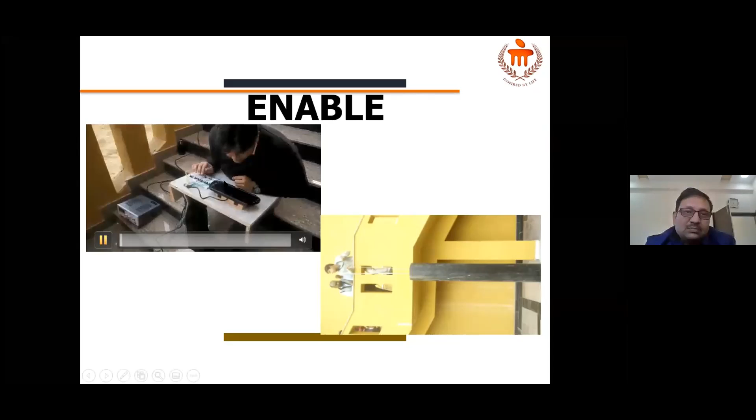So what we tried with my team here in Manipal University, Jaipur, is a similar exercise by making a robot. I'm going to play another video for a short time. This is the instrument, the robot goes inside, and on a dummy baby, what we do is figure out where the space is around the baby, and grip the baby and pull it out.

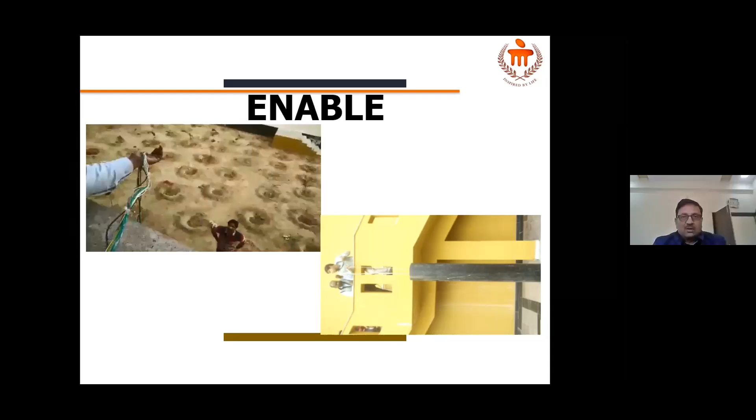We created a small 12-inch borewell, or 8-inch borewell, and we created a robot. The robot goes inside and is controlled by a person sitting outside.

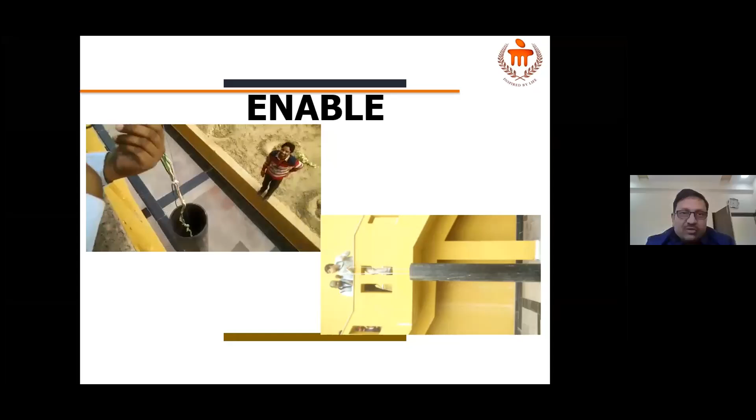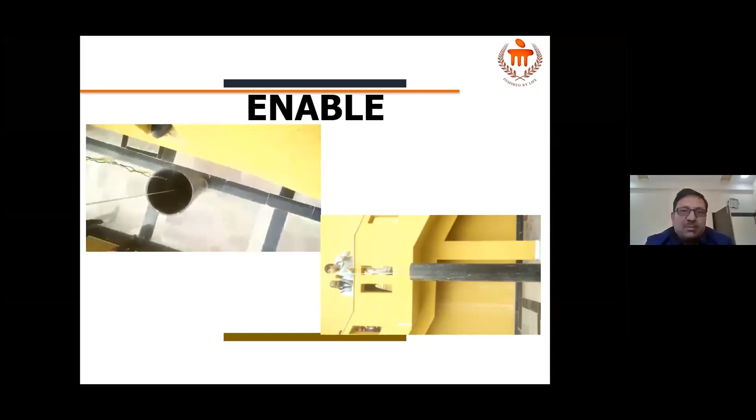We also made it programmable, but with the help of human intervention through visualizing sensors and cameras, it became slightly easier. So we continued with the camera, but it is a robotic arm for rescue in borewell operations. It's trying to find out the space around the baby, or a dummy baby, or a bunny which we have thrown inside this tube.

When it goes around, it is a very interesting field actually. You see how difficult it is, what methods we use, and can't we all make this technology perfect?

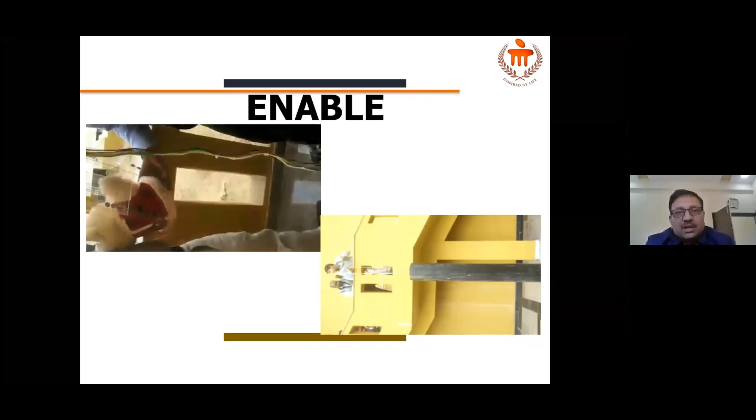On the screen it was visible, and see, this is the small machine that we have made, and inside you can see the bunny now. The bunny is being pulled out, and there's similar enthusiasm among the team, and they are very cheerful after having this bunny outside.

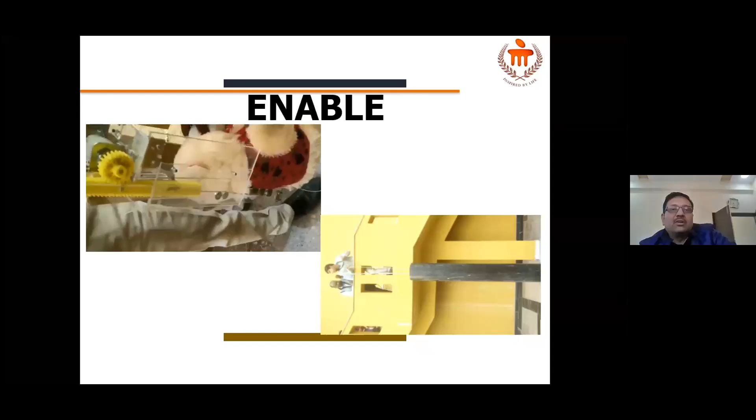Now, this has not been experimented on in real time, because though we were called to one of the districts and the SP, Superintendent of Police, did call us, by the time we reached the spot, everything was unfortunately in a bad shape.

So this technology of robots should also be for societal connects. If you make a robot for society, that is what should enthuse the listeners of today's talk. My understanding is, just for the sake of fascination, we should not learn robotics. Robotics should be learned to use it, for a purpose that actually gives society something back.

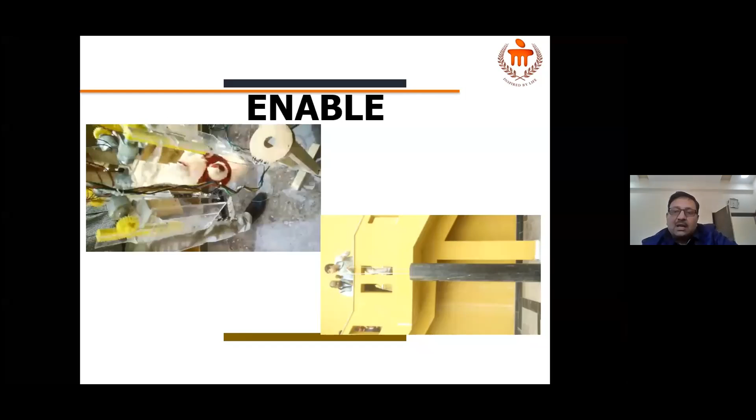I have one more example. There are a lot of people who have had an amputation. The hand gets chopped off, maybe in a military region, or maybe someone working in farms with thresher machines. We have a Samiti, a charitable trust here in Jaipur, called Bhagwan Mahavir Viklang Sahayata Samiti, and the director there, Dr. Mehta Saab, asked me to create something like frugal engineering and make a hand that is less costly.

Let me tell you, friends, that making a hand is not all that difficult. Bhagwan Mahavir is already making hands, but these are static hands. What is available in the market is one we call the Alimco hand, which actually uses a lot of stress on your body, gives a lot of stress.

So what we were asked - if you want something very sophisticated, the least costly comes from China, which is INR 1 lakh, minimum. And you can think of this money - if our Indian brothers and sisters would go for 1 lakh for one hand, how many of them can afford it? So the challenge given to us was to make a frugal, less costly hand.

And this is what we did with some of our students. I can show you the picture where the whole team is working here. The team has now opened a company, and innovations have happened in this. It's now called the Jaipur hand - like Jaipur foot, we have made Jaipur hand. And continuously we are improving on it.

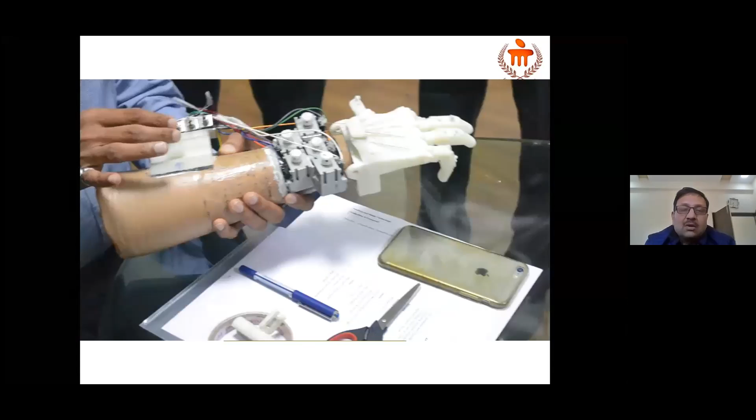I think there is a small video which I'll show also, so you can see how it works. You will have these switches, and these switches are now operated by Myo - you understand the muscle signals. So you can actually close and open the fingers and rotate the wrist also. This is a very old video, and it has improved a lot now. So this is the hand.

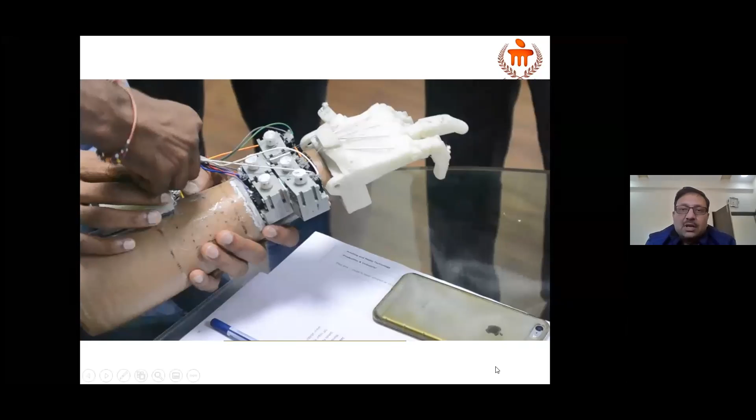Now let me come to this - so this was Jaipur hand. You can make your own hands, which is robotic, where these motors are switched on by myo signals, the muscle signals. It's a good idea - if you understand robotics, you can go for something useful to the society, and you can think of your own projects or pick up one of these projects as your own.

Now, as I'm talking too much on the hands, let us talk of the hand. Look at your hand - your arm, forearm, and the whole anatomy of your hand. If you look closely, you will see that there are links and joints. Look carefully - there is nothing mechanical there, but there are links. Links are made by bones, and bones are surrounded by muscles. The objective is to move the link by the joints, about the joints.

How do you power the joints in a real human being? By pulling and pushing muscles, and the pulling and pushing of the veins there. So you actually get your motion by a powering device, which is your muscle, and your links move about. I'm talking now more technical terms, so please listen carefully on this.

Between two links, there always will be a joint. Look at your hand or whole of your body, whether it is leg, hand, torso, whichever. So there will be links, and between links, there will be a joint. Also, between two joints, there will be a link. I'm repeating - between two links, there always will be a joint, and between two joints, there will be a link. We have to move the link about a joint and power that movement.

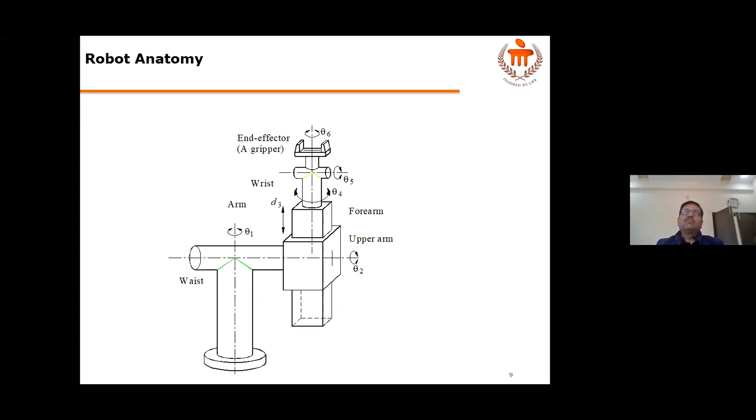So let us look at the second step of what we do after knowing and configuring our robot, whether it is 6 degrees of freedom or 4 degrees or 3 degrees. 3 degrees will not move.

End effector has to reach the workspace. So now going forward,

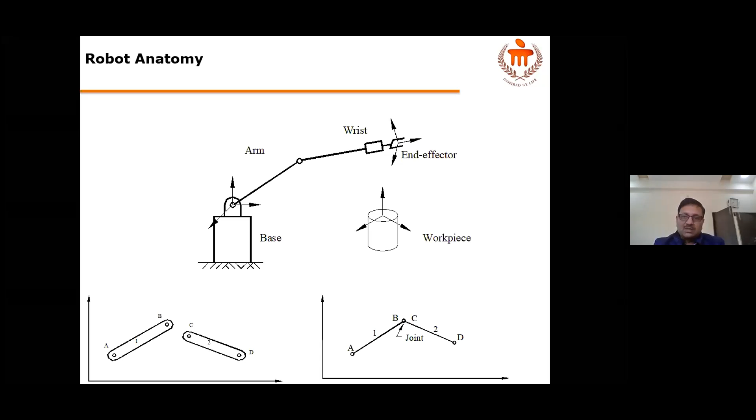What kind of joints that we have in our robotics, you can see that there are a number of joints which you can make. God has made joints which are multi-degree of freedom. For example, if you look at your shoulder joint, it is a ball and socket joint, right? If you make a mechanical joint, ball and socket, it is possible. But to control the motion, that means exactly rotate that ball and socket in X, Y, and Z direction, is a tricky problem till today. So instead, we prefer in robotics single degree of freedom joints.

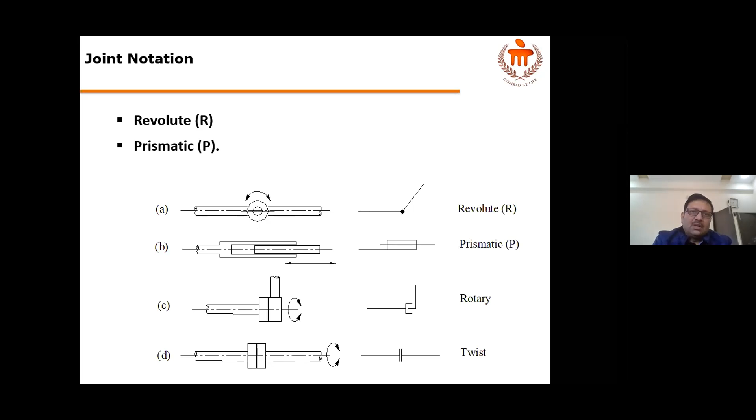Now, what we need to do here is, combining these, there are very many kinds of robot configurations that can be made, like your gantry robot. Gantry robots have 3 prismatic joints, which move in X, Y, and Z. So you must have seen these in some of the industries.

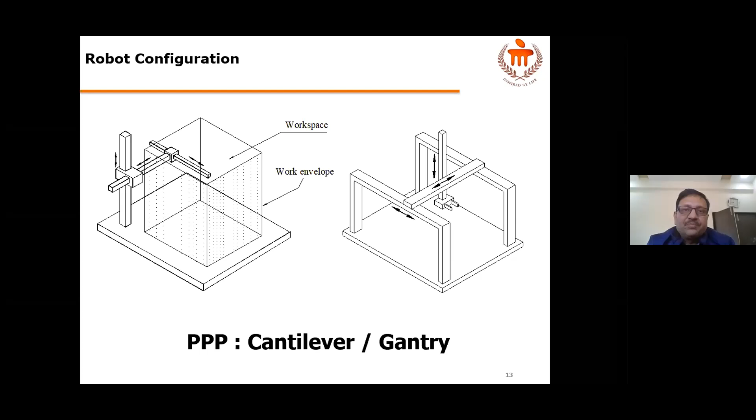So keeping that in mind, you have many configurations that all move prismatically. All three joints are prismatic. So you can see that the first joint moves up, second joint moves in Y direction, and third is in X direction. So one is in Z, one is in Y, one is in X. And you get a workspace like this. That means within this cuboid, you can actually operate on any of the workpiece by moving certain distance in all the 3 directions. So having this done, we may have an RPP type kind of thing.

Look at the geometry, that cylindrical geometry if you want to make. So you must have one rotary joint at least. So you see one theta direction and 2 D directions. So this particular robotic configuration moves in vertical direction and lateral direction, but also rotates, creating a cylindrical geometry. So this type of configuration we call RPP.

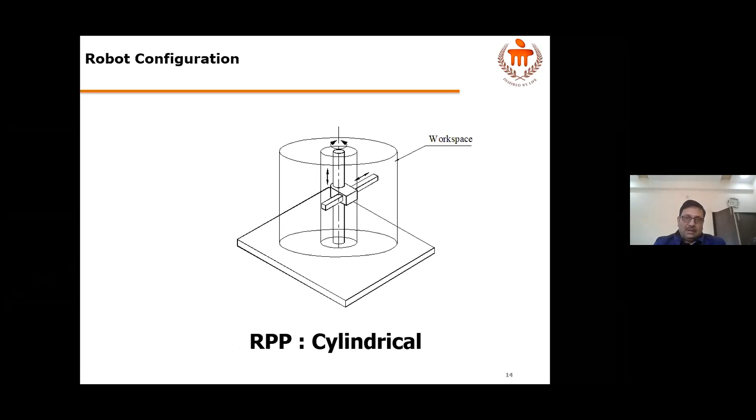Similarly, you can have a spherical robot, which is RRP. So you can move in azimuthal angle or zenithal angle. That means 2 rotations and 1 prismatic. So you will have a spherical robot.

I mean, manipulating, how do you want to manipulate a particular instance? You may choose a gantry robot. So sometimes your industry does not require cylindrical manipulations. They only require to pick and place from the top. And therefore, what you do is you have only a PPP kind of robot there, but in more sophisticated spaces where you have to bolt something from an angle and you have to put something on the top, if these kind of things are there, then you really need a spherical robot.

So you can make these kind of combinations of joints to create different kinds of shapes, that is the work environment in which your robot can work. So there are a number of such things which you can easily find out in your textbooks.

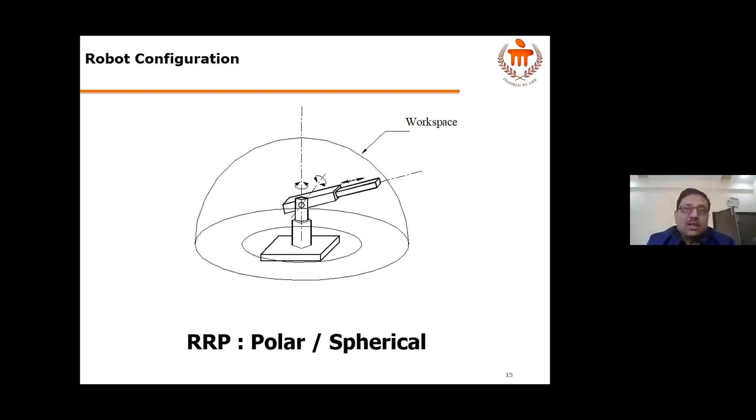But this figures out what kind of design are you making. So similarly, RRR is a revolute or articulated robot, and SCARA is a special category, which has 4 joints, RPRR.

This is called SCARA configuration, selective compliance assembly robotic arm.

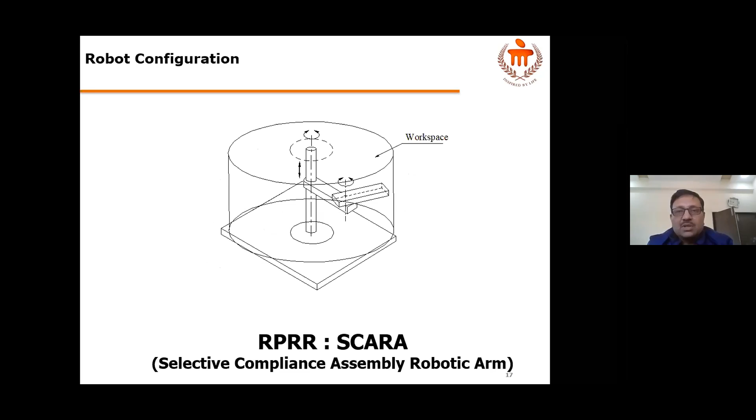Your wrist has three motions: yaw, pitch, and roll. Yaw, pitch, and roll mean you can move your wrist up and down, sideways, and also rotate or twist it. These three angles can be obtained at the wrist joint using a simple configuration. So have the first 3 degrees of freedom, RRP, RPP, PPP, and then put a wrist there. With this, you have a very highly flexible robot, what we call a dexterous robot.

We call it dexterity, meaning manipulability from many angles. The higher the dexterity, the higher the manipulation ability from all directions. So you can achieve this by having a particular configuration and then putting the wrist over it. This is mechanical configuration.

Now suppose this particular wrist has been attached to a certain robot, and a point is defined at the faceplate. Suppose a point is defined on a frame XYZ on the faceplate.

Am I audible? Somebody can confirm. Am I audible? Yes, sir. Yes, sir, audible, sir.

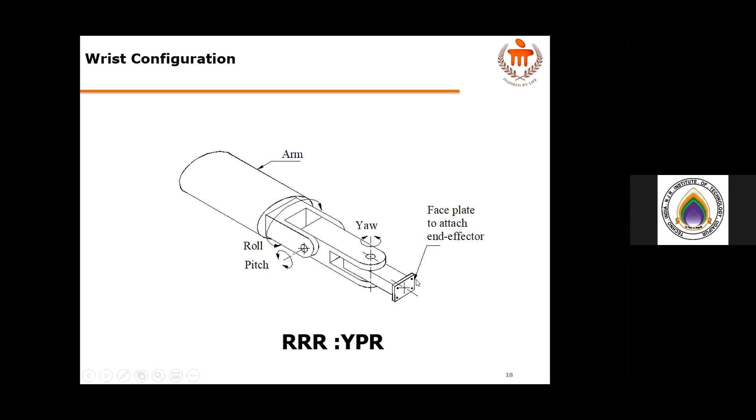Okay, so put simply a frame on the faceplate XYZ and define a point on that XYZ. Now, how much should I rotate, or how much is that point visible to the pitch of it?

I have to transform that point from one frame to the previous frame, and so on, until I go back to my fixed end. This is called transformation. So there are rotational transformation and translatory transformation.

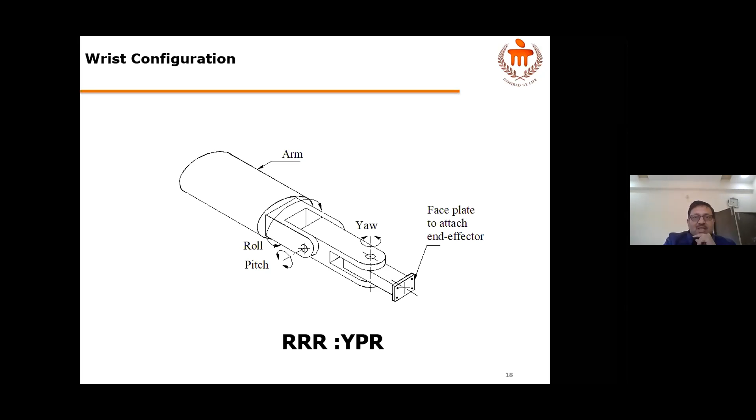That is the next step, we will know by this. This is called forward kinematics, and that is a very important thing. For example, if you have a robot like this, you have a base frame. So the base frame is X0, Y0, and Z0. And the final frame on which an object has to be is the tool or end effector frame.

This XYZ of the tool or end effector frame will be sensed by a sensor, which may be a CCTV camera, CCD camera, infrared ranging, or whatever ranging or sensing system. You actually find out first the coordinates of the tool or end effector frame. It has to reach the object. So that particular sensing is done, for example, and then you also sense the base frame through the same sensor mechanism.

In between, on all joints, we fix up frames. These frames will be rotated and translated with respect to the previous frame. How much this point of the end effector is visible with any of these frames is what is studied mathematically, what we call dynamic analysis or forward kinematic analysis in robotics.

What this will give you is, with the transformation matrix, given θ1, θ2, up to θn, you will be able to tell how much is XYZ. I am repeating: if you remember what I said in the beginning, joint space will give my Cartesian space coordinates. A rotation of each and every joint, θ1, θ2, θ3 to θn, will tell me how much is XYZ.

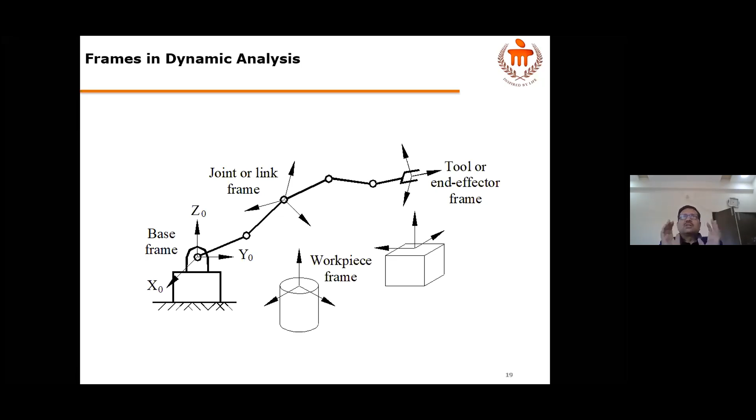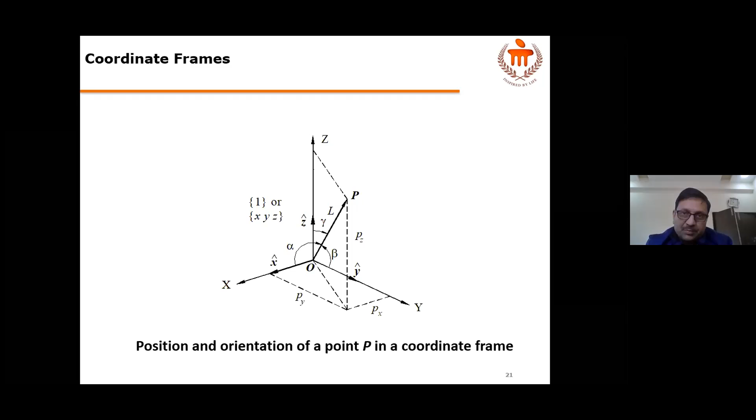Suppose there is a point P, and this position and orientation of point P in a coordinate frame is known. If you know the point P in a frame, which to me is the end-effector frame, then you define that point in the first frame as 1P.

So this is a simple vector matrix notation of point P. The distance of point P is Px, Py, and Pz. If any point Px, Py, Pz has to be defined in a frame, it will be written as Px x cap plus Py y cap plus Pz z cap. All right, so this was simple.

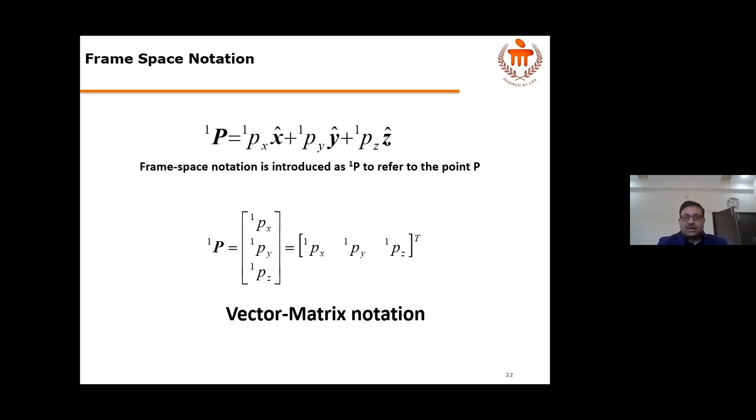Look at the right hand side: the same point 1P I have already defined as Px x cap, Py y cap, Pz z cap. But in a second frame, if I have another frame UVW, apart from the XYZ frame, this UVW frame is rotated relative to XYZ. It is not translated. Suppose at the same point I have another XYZ rotated in the XYZ direction, and now I call it the U, V, and W frame.

So let me define the same point P in frame 2, which is my UVW frame. Suppose in this second rotated frame, the X direction is represented as U cap direction, Y cap becomes V cap, and Z cap becomes W cap. So in the second frame, suppose the distance in the U cap direction is PU, in the V cap direction it is PV, and in the W cap direction it is PW.

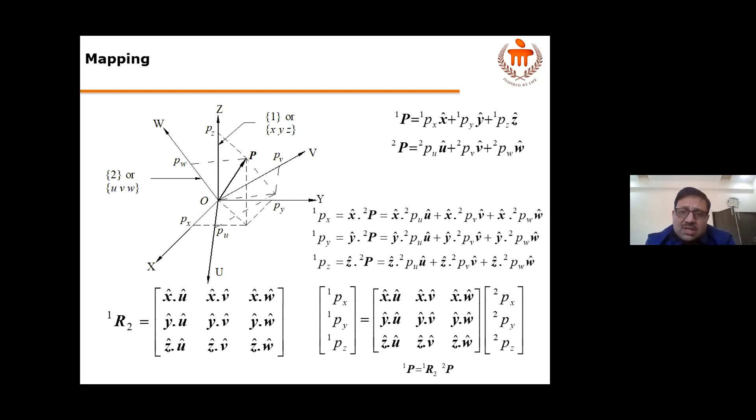Therefore, the same point P as seen in XYZ, that is 1P, will be nothing but u in 2P plus dx along x cap, plus v in 2P plus dy along y cap, plus w in 2P plus dz along z cap. So therefore you will have 1P as a translatory matrix.

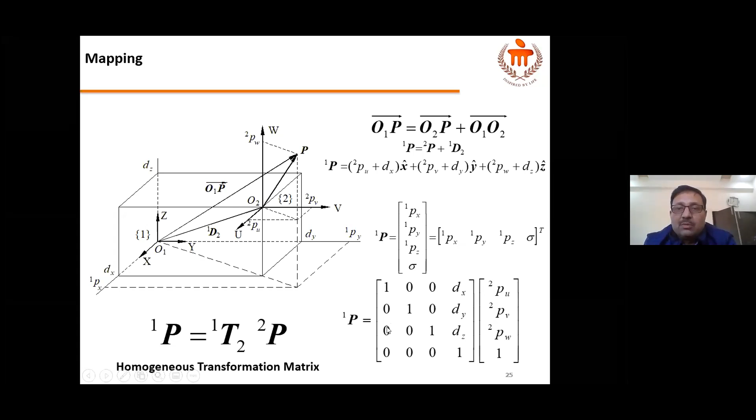If you combine the rotation and translation, then this identity matrix—1 0 0, 0 1 0, 0 0 1—will be replaced by your rotational matrix, something like this. If both rotation and translation happen, then your overall transformation matrix will look like this: the 3 by 3 block is your rotational matrix, the 3 by 1 block is your translation matrix, then 0 0 0 is your perspective matrix, and sigma, that is 1, is your scaling factor.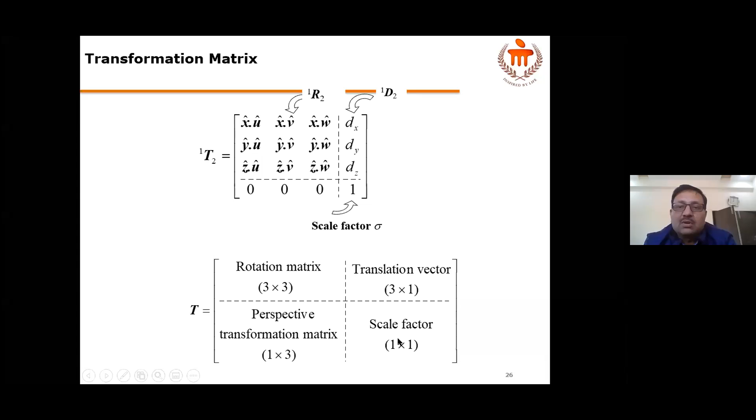So you get a transformation matrix, and if I have to transform from one frame to another, I keep pre-multiplying them and get it up to the baseline.

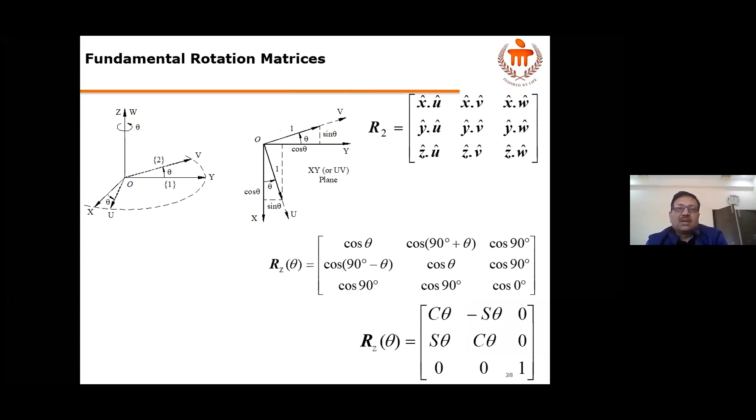So I think if I put the thetas there, I'll get the real values, and I'll solve a problem for this so you understand it more clearly. Suppose, so here, coordinate...

I have one quick question—so that scaling factor is only one value. What if we have different scalings in the X, Y, and Z directions? Is that possible?

It is enlarging—that is actually what happens through the camera, we have a perspective. No, but so the three... No, with the single sigma we are enlarging by the same amount in all directions. That is the sigma factor.

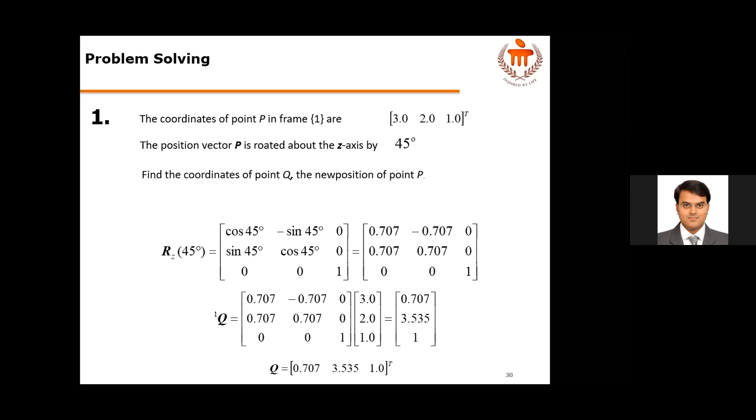Okay, so for example in computer graphics, we may stretch something in one direction and leave it unchanged in the other two directions—then it will not be applicable in that situation. No, then you do the perspective.

That means you enlarge in the x direction—there are 0 0 0, you put some value there. So in x direction, suppose you want to enlarge in two dimensions—you put a perspective, so that through perspective vision, this dimension has got enlarged by this much amount. So this is homogeneous enlarging, zooming in or zooming out.

Correct, and inhomogeneity is more complicated, so I'm not including it here in the first go of lectures. If we are really interested, then that thing should also come, but we don't play around with it because it is not that complicated an environment in real time—we don't keep enlarging in X and Y inhomogeneously.

That may be of interest to an academician, for someone who wants to make a difficult paper and complicate student life—let us make it easy and tell them that in real time we only need some enlargement. Normally it's the perspective which plays: the camera takes a sense of the object and grasps it, and that grasping happens through a perspective where some of the dimensions get enlarged, and that is the perspective part of it. So I think I am able to answer that for the students—yes, also yes.

And then a difficult task. I'm trying to concise my lectures, at least giving some glimpse of mathematics which goes on. And mathematics is not difficult, as you have seen here. It is only transformation and getting theta to x and x to theta.

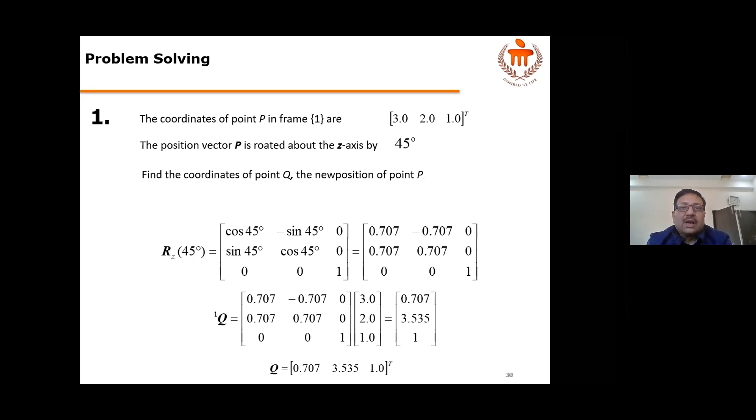And if translation and rotation both happen, then another exercise has been given which you can go through. So what I mean to say is, forward kinematics and inverse kinematics are the two steps you do first.

And if we are able to do this vector-matrix multiplication, pre-multiplication, that happens through your programming, and then you control your joints. And then you take up the dynamics and controls part of it. So this is what a robotic study will take you to, which is currently being done.

But in Industry 4.0, the controls will be through IoT. I mean, sitting in your chamber, you may be able to control robots. You may be able to change programs. Sitting in another city, through the internet, you might be playing around with devices which are robotic in nature. So that is what is being expected today, and is possible today, which we are all doing.

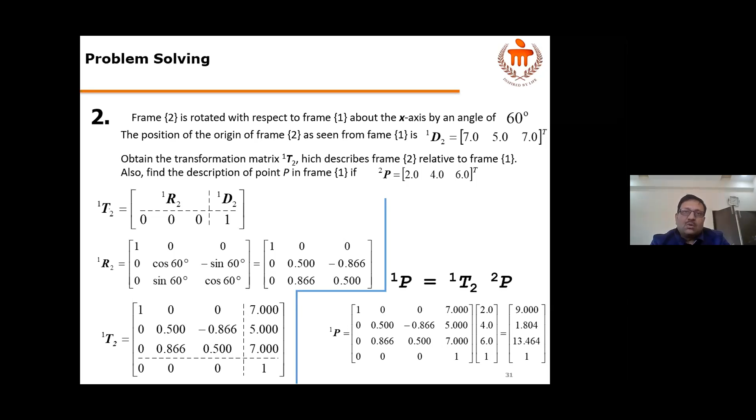Having said that, there is another field which is developing, and this is more interesting, which I wanted to tell the students of this particular interaction session by TEQIP 3: that not only in this direction is there a lot of possibility of macro robots, but also one new field which is coming up is the miniaturized world. I mean, everything is happening at a smaller level. So let me say, whose world is this?

Do you know how many ants are there on earth? We feel that we control the earth, but who is actually controlling it? We don't know, right? We saw this effect during Corona, where we were inside our houses and nobody stopped the ants from coming out. Just giving an example and analogy. There are 10,000 trillion ants on earth by a rough estimate from National Geographic, and humans are only 7.2 billion. They are more organized, and in a small sense, they are like us. They are living beings, while human beings are living beings with a brain. So if a small device like an ant had a small computer chip, it could act in a very strange manner. The world actually makes smaller things survive more than bigger things.

You have seen that bigger sizes have vanished from earth because they required more power to move and more food to survive, and nature didn't favor them. There is very high attention among scientists on the smaller world, trying to make smaller robots.

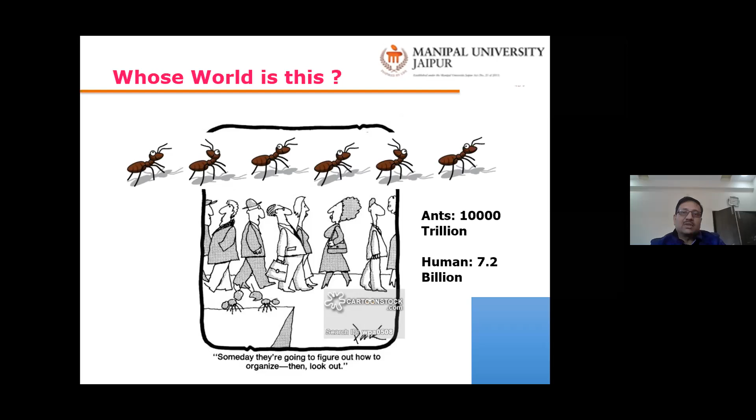As I said, nature has millions and millions of submicron species, like your virus. The coronavirus is changing every day, coming in with different strains, and millions of them are surviving. Whereas the mammoth has gone extinct from nature - larger sizes, maybe 10, 100, 200, or 1000 times our size - those species are not available anymore. So why not think of making smaller devices and smaller robots, not just devices, but robots?

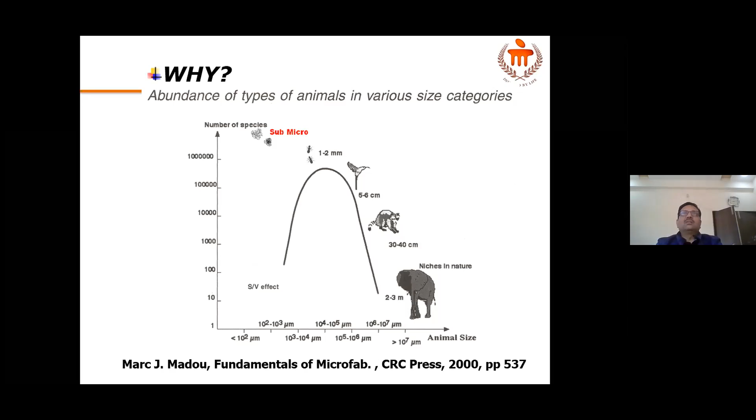In this direction, nature actually plays around in smaller domains only. The colorful things which we see around are not actually pigments - they are actually a play of nano-texture. The texture creates interference, light interference, making it colorful in different ways.

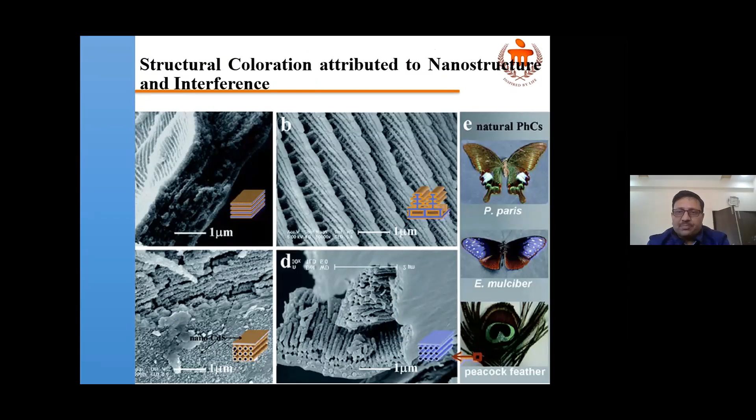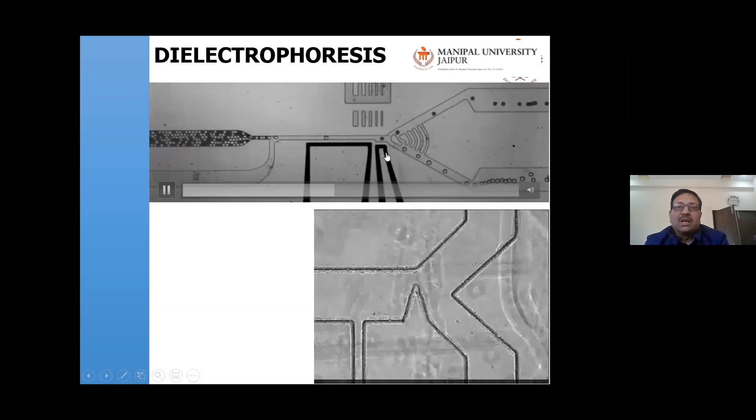Let me show you these smaller dimensions. You can use dielectrophoresis to separate out particles. You can see one going on - simply by doing a dip here and applying electricity across, they have separated the cancer cell. You can see that the bigger cell has gone to one side, so if there is blood cancer, you can separate the cell. In the lower video, you'll see that bigger dimension cells go in one direction because we've given an indent here, changing the electric field lines. The smaller dimensions are very useful, and along these lines, we were thinking of micro robots.

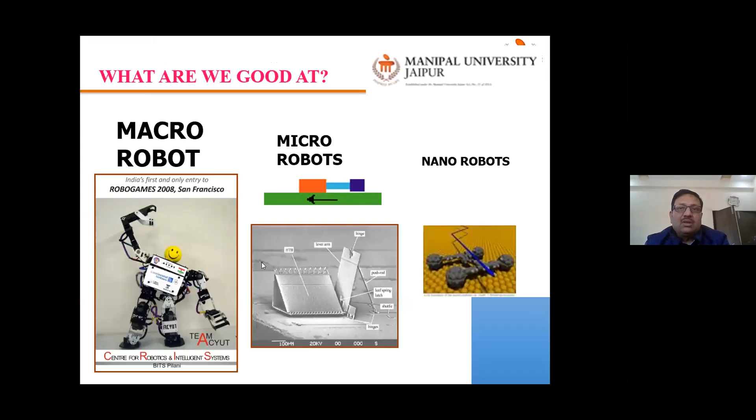They are difficult to manufacture. Micro robots are easier, so microrobotics is maybe used for handling objects with very small dimensions. So if you want to learn about the world of ants, you have to have that small camera or small object to go inside the ant world. Or you want to do micro assembly.

Suppose your mobile is not working today. Maximum you will do is throw it away. Why? We can actually repair it, no? If there is some circuit which has got burnt off, not visualized by eyes, but if I have a micro robot, we can actually fix it. If I ask you to throw away a car because some pipe has got broken, is that possible? No. So similarly, when there are small devices in our hands, why do we throw them away, creating junk?

So micro robots, smaller robots, biotechnology, medical health, maintenance and inspection, monitoring and surveillance, everywhere. And if you want to read more about it, just search IEEE robotics microrobotapplications.pdf on Google, and you will get the complete story of why micro robots.

So this is another dimension which is going to come up in the next industrial world. And when I talk about this smaller world, the robots which we imagine walking around will not walk, because modes of motion normally are walking, crawling, hopping, flying, and swimming. But in nano domains, only flying and swimming is possible. So smaller robots will not walk, crawl, or hop.

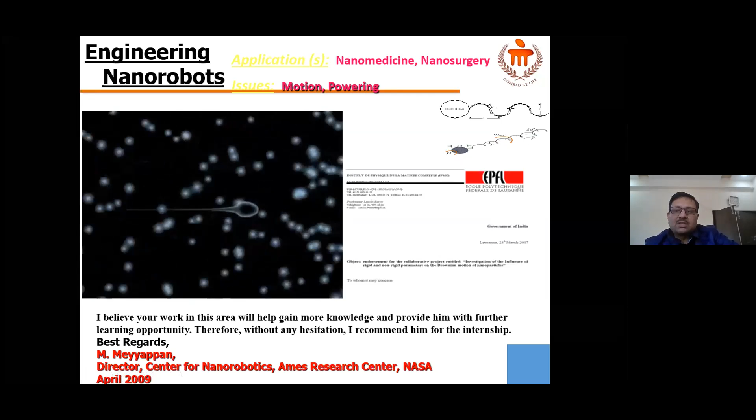So you can see one of my works which NASA took up, a swimming nanorobot. I'll repeat this video again. You must be having a flagella. So what you must have seen is how biologicals move in nano size. You see that biologicals are something very near to what I'm talking about. So they fly or swim, very rarely they crawl. And how do they fly or swim? In three ways, shown here.

And the three ways are shown here. Either they have a flagella, or they have a motor which we call a myosin fiber motor protein bundle. The second figure tells you there is a motor protein bundle which carries things along that bundle. Or you have what is called advancing a cell on a substrate by adhering gel, meaning it actually sticks and then slips, sticks and then slips.

This is the first method, schematic representation of advancing a cell on a substrate. There is a cell body, and what it does is it protrudes itself. Adhering gel is there and non-adhering. As soon as adhering gel is there, the cell body moves forward. Similarly, it again moves forward by pushing its gel. But the best method is flexible oars, that it has a flagella, for which I have just shown you the video.

So looking on to these points, friends, my group actually started analysis of flagellar motion. A lot of research has already happened in this direction. My suggestion to some of you who would like to take up this next generation robotics, which is nanorobotics, is you can think of your own experimentation. See, macro robot is fascinating, and there is a lot of understanding, and the field is saturated on the mechanical side and designs, with many groups already working on it.

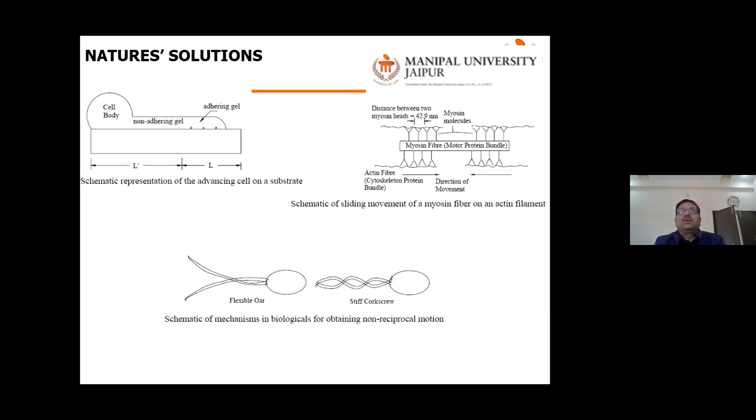Going forward, you could do macro robotics with a societal intent, like making robots for rescue from borewells or something like that.

My suggestion is, if some of you want, look at what we have done here with flagella. Still, we have not done anything on the powering of nanorobots. How do I make my flagella flap? A motor that small is not possible. How does nature do it? By converting ATP to ADP, adenosine triphosphate to adenosine diphosphate. There is a controlled chemical reaction that powers the cells. If you have cell motion, it is actually powered by some chemical reaction. We do not have any technology for this, and this field is quite open.

Across the group, we are stuck with how to power the nanorobots. In real time, a fixed robot in industry today gets its supply from electric power lines. There cannot be an electric power line for a nanorobot inside your body. So these are challenges, and if somebody takes an interest, solutions are there. There are many transduction and transmission systems already studied. There are issues, but they have been studied. There's hydraulic, electrical, chemical, many ways people have tried, but no matured solutions have come till date.

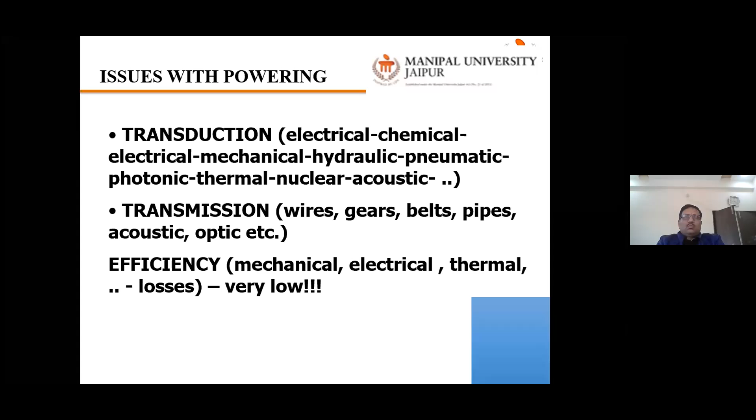So what happens is we may have challenges on board and off board kind of thing. Self-generation is something we can think of, but this is about powering.

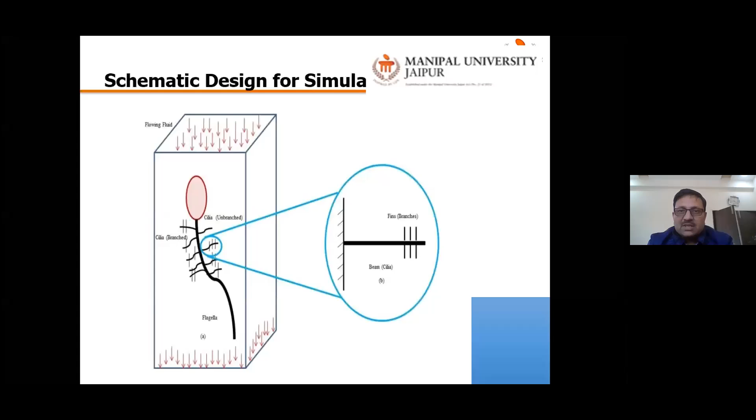Now, what we have done is, if there is power available to flap the flagella, we increase the efficiency by making branched flagella, like flagella with cilia we must have heard of. We made branched flagella, and a lot of publications have already worked with flagella. We made an experimental setup also, which I'll show you.

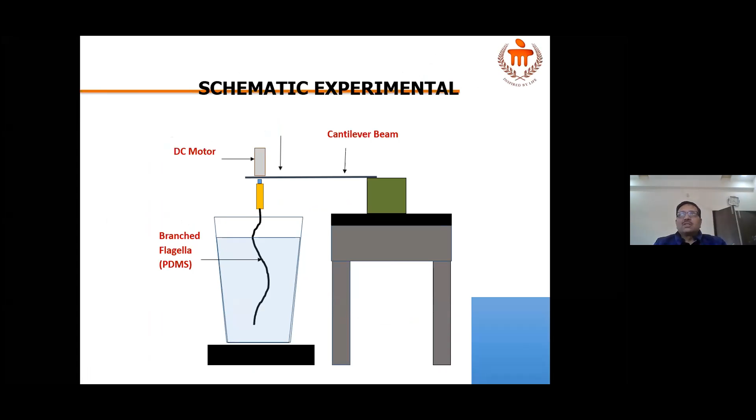This experimental setup is not on the nano size domain. What we needed to do is scale things up using Buckingham Pi theorem, so that the environment around these flagella will be very thick and viscous by scaling it up. So we used Buckingham Pi to scale everything around them, and then did the experimental setup.

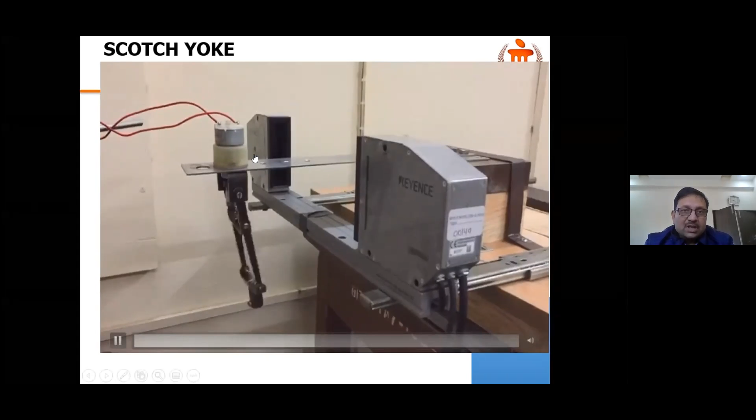So what we did was, to create that flagellar motion, we introduced a motor and a mechanism. We first oscillated it without the flagella. Here we can see the cantilever moving in a vertical motion. With this horizontal oscillatory motion, how much thrust is coming on the flagella?

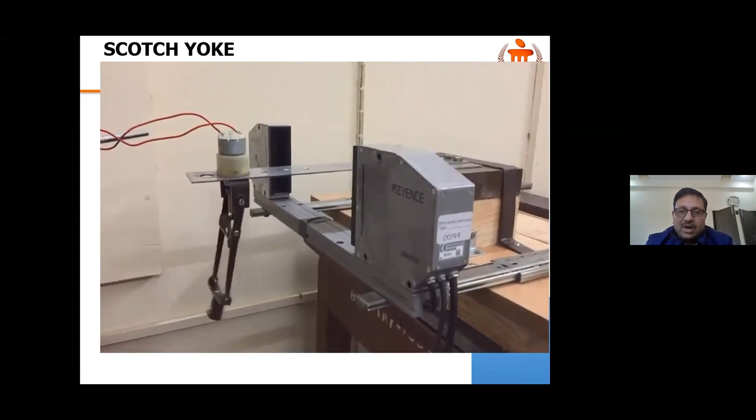Next, we added the flagella with the environment. So this next video shows that. There is a bucket with silicone inside, and we added a flagella to the oscillatory mechanism, and you can see the additional power.

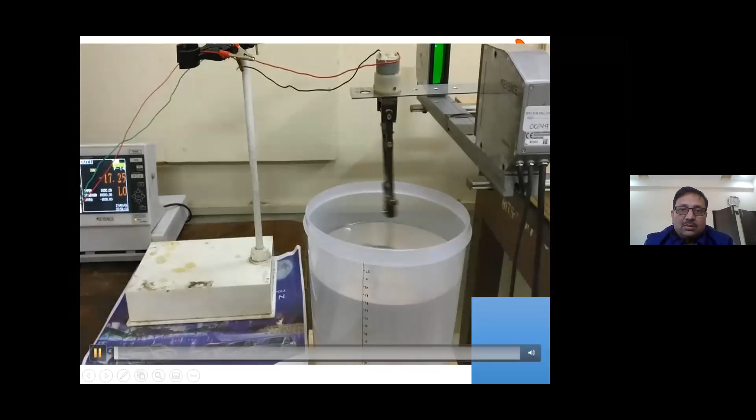You can see that the cantilever now oscillates more, meaning there is more thrust. If something flaps like a flagella, there is a horizontal thrust, and that thrust is what we obtained. We figured out that as we make this flagella more branched, there is more thrust, and therefore there is a possibility of actually propelling a nanorobot or making a nano swimmer.

Some of you might be interested, I have a lot of publications here. We've published in IEEE Transactions, Bionanoscience, and ASME Journal. My group also has experimental facilities on nanorobots, but at a scaled up level, a bigger experimental setup depicting smaller size behavior through simulations.

There are a lot of things robotics is going to bring in our future with the revolution happening around us. Technologies are developing, the internet is developing, cyberspace is developing, and most things are happening online, as this lecture itself.